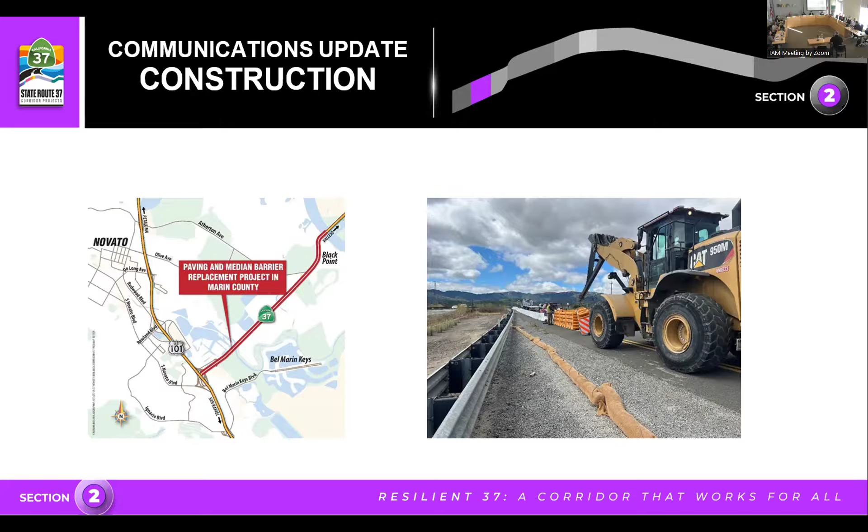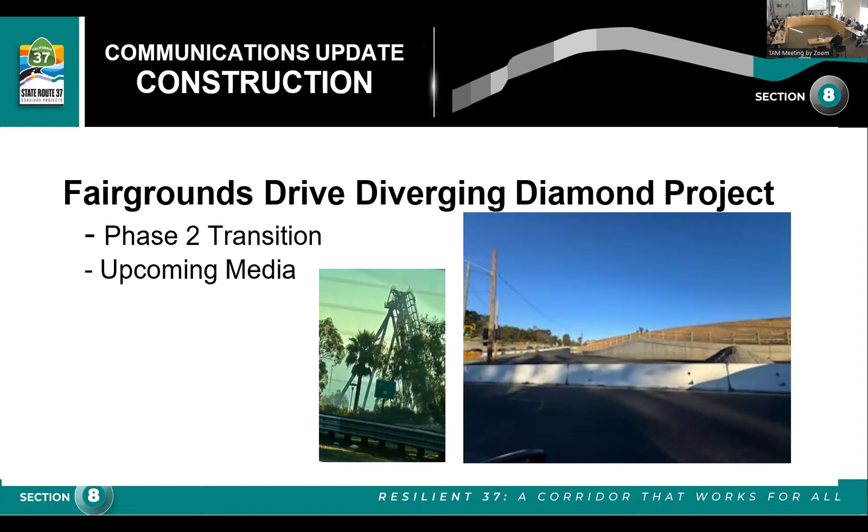So in March, you'll start to see some media work from my team prepping the public for this. We've got a fantastic animation that we've shown in previous policy committee meetings that we're going to be pushing out a little bit more through the media to get people ready for it. Those are our construction projects, and that project should be wrapping up in June. So moving on, because I know we want to keep it going.

The next slide should show flooding. So we did have flooding happen this January that basically closed the route westbound direction or eastbound direction for about 11 hours. And so this slide shows the two locations where it happened. The Marin area, we've seen; we don't see the Vallejo area happening as much.

And so the reason for it is kind of like a perfect storm. Whenever we see king tides happening at the same time we see an atmospheric river or heavy rainfall, then our maintenance teams, Caltrans maintenance teams, get ready to provide mitigation for flooding. In this case, I believe we had a supermoon, or like we had lions, tigers, and bears basically coming at us for this one. So we did see some flooding happening on the Vallejo side.

On the Marin side, because there are levees there, the maintenance team can do pumping and other things to clear the area. And on the Vallejo side, where this took place, there's nowhere to pump the water. So we basically had to wait for the waters to subside. So the next few slides that we'll just run through quickly will give you an idea of what the storm waters look like and how they were impassable.

These first ones are in Sonoma. So we can go through this one, Sonoma, the next one. That one gives you a little more idea of the debris that's left behind that we have to clean up before we can put the road back in service. Keep going, please. Okay, again, that's Sonoma. And then if we flip over to Vallejo, that's also Sonoma. You see a lot of debris on the Vallejo side, and we literally had to have maintenance out there kind of make a judgment call on when we could reopen the route. Next one.

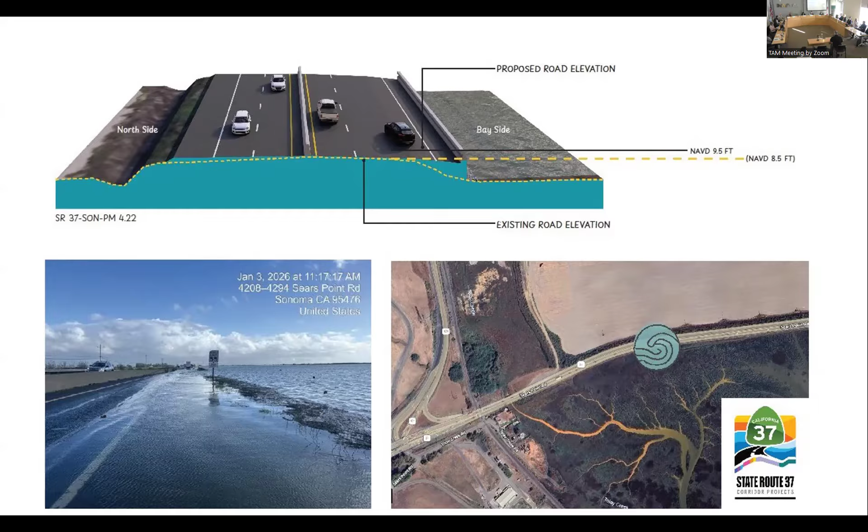If you want to go to the next slide. There you can see the debris and that type of stuff might have been held to a minimum. It would have probably reduced the amount of time that the route was closed. The route was closed for approximately 11 hours, but we can't say for sure that it would have completely mitigated this particular flood, but it definitely would have improved it. And Javier, as the project manager, anything you want to add to that? Sure, Bart, thank you.

Yeah, another improvement as part of this project is we're doing embankment improvements. So in some sections, we'll have an embankment confinement system at the edges, and in other sections, we'll have a pile-supported retaining wall. So that would itself act as a shield to protect the pavement section. So here, it's sort of exposed to damage on the pavement from the flooding. So that's another improvement that you would see as part of this project.

Okay. So wrapping up from a communication standpoint, on the construction projects, our primary public communication has been through traffic advisories and through social media. In Vallejo, where we've got the diverging diamond interchange, we've been working closely with the CVO to help the Crest community understand what the impacts potentially will be. Obviously, we've got big barriers that are in place there right now.

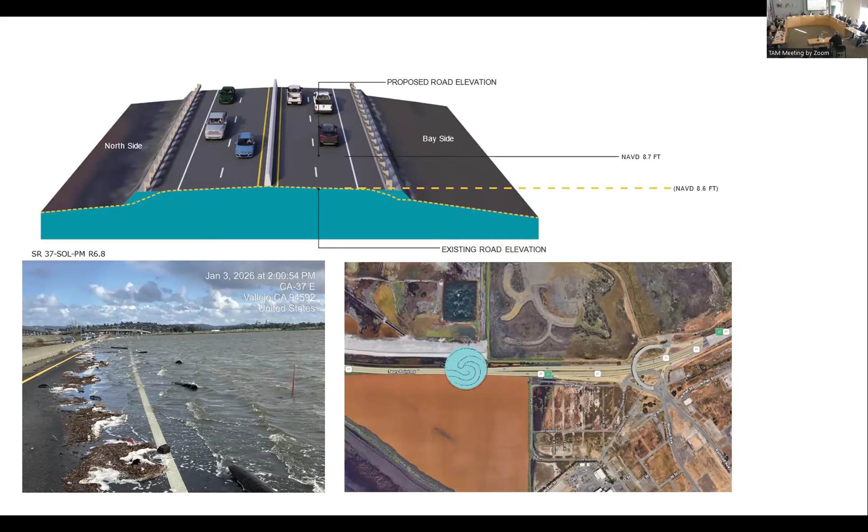So we felt like we would share that in the communications portion of our show because it's a natural question that comes up given the fact that we lost the route again this year. And with that, that's everything we have going on in communication. Thank you, Bart. Any questions?

Mayor Sorce. Well, thank you for the update. And we had talked a little bit last year about, especially in Vallejo and Solano County, the concerns over the tolling and kind of regrouping and doing some more outreach in the community, given that the polling that informed this project was done many years ago, and the residents did say they valued addressing the congestion. Although they didn't like the idea of a toll, the highest priority was to reduce the congestion, and we wanted to kind of loop back and make sure everybody was aware of kind of the reasoning behind this and the work that had been done.

And you know, given the flooding that just happened, I kind of wanted to elevate that again, because I think that put it in the forefront of everybody's minds. I certainly got some communications about it in Vallejo of like, my God, how quickly can we get this project going? We clearly need it. You know, the interim project, like, would we love a raised causeway? Great. Would we love to try to get funding to do it without having to toll us? Like, yes, but how quickly can we do this?

So I kind of wanted to raise that and see if other folks in other counties have gotten similar comments from residents of just this flooding kind of accentuated that we really don't have a choice but to do something as soon as possible. And I hope we can continue those plans to re-engage the community in Vallejo, because there very much still are concerns about the tolling and the equity of the tolling. And we need to have those conversations, but there's also a renewed urgency of like, we're dealing with flooding issues that aren't going anywhere, and we can't really wait much longer before we address this.

Morning, members of the Policy Committee. My name is Kevin Chen with the Metropolitan Transportation Commission. I'm joined by Javier Mandeville of Caltrans. We're here to provide you with an update on the near-term Sears Point to Mare Island Improvement Project. Next slide, please.

So today's focus is going to be on construction package 1. Now I just want to provide a little refresher on the construction packages as shown in this exhibit to the right. So for the purpose of project delivery and based on availability of funding, we are going to divvy up the project in 3 phases for delivery. The first one, as shown in red, originally would start from west of 121 to about a mile east of 121. And one of the major components of the first work package is to replace the Tolay Creek Bridge.

So that's package 1. Package 2 is to really build out the rest of the eastbound direction. That would include the Strip Marsh East that we just talked about, as well as initiate tolling on the corridor. Phase 3 is to finish out the project in the westbound direction, including initiating tolling in the westbound direction. So that's the overall construction phasing.

But today, again, the focus is on package 1. So today we'll talk a little bit more about the updated project cost, our funding status, schedule, and an update on the CMGC process. Next slide, please.

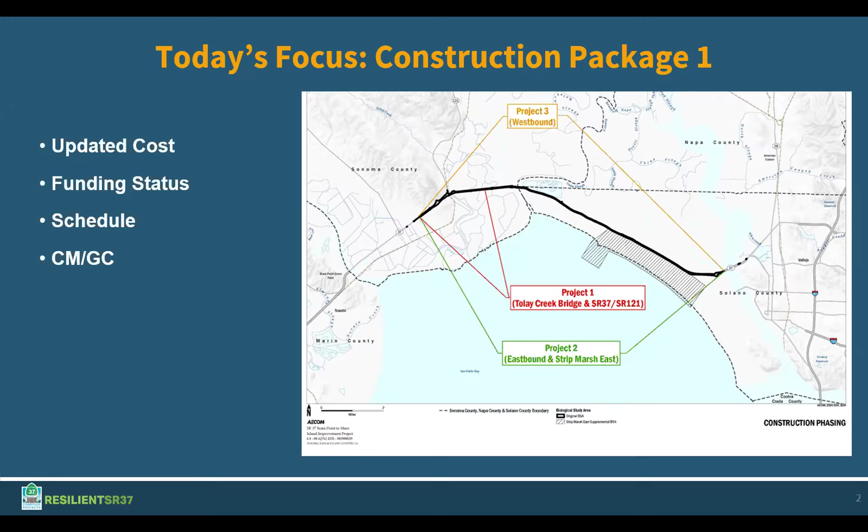So since we last met in November, one of the major updates that we need to provide you today is the construction cost estimate, which had increased very substantially since the last meeting. So we're looking at the previous estimate back in 2024, and we're looking at only construction capital costs. For package 1, it was in the order of $93 million. And in November, that estimate went up to $155 million for package 1. Again, just construction only. And the difference is more than $62 million.

So this created a huge challenge for us because this is significantly higher than the funding that we had previously secured as planned for package 1. Again, the numbers that we're showing on screen are for the original package 1 limit from west of 121 all the way to 1 mile past to the east side of 121. Next slide, please.

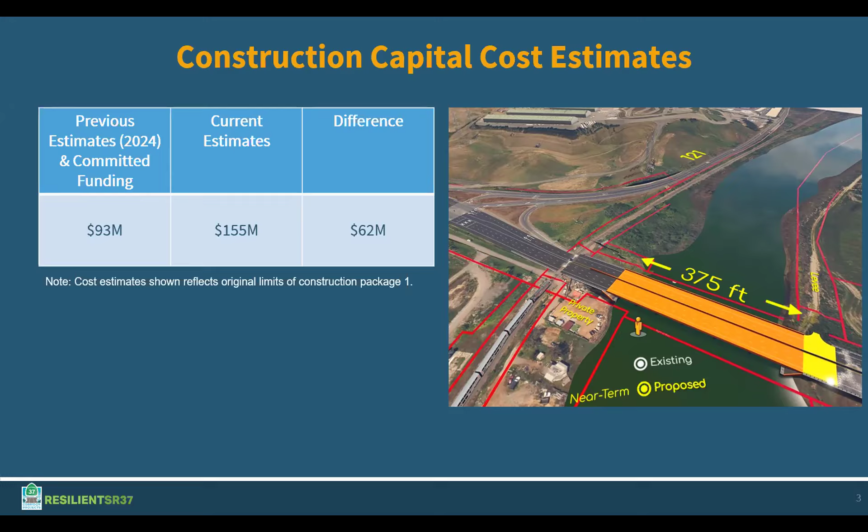So in terms of what's driving up the costs, one of the primary areas is really due to structural items. And that's really predicated on the subsurface conditions on this corridor, which really sits on a very thick layer of young bay muds. So through more detailed geotechnical studies throughout the design process, as well as more engineering calculations that were needed leading up to the 95% milestone that we talked about last time, it was really determined that the sheet pile walls that were previously proposed would not be sufficient and would result in excessive deflection on the roadway,

causing potential unsafe conditions. And because of that, we are moving to constructing retaining walls instead, along with the new bridge at Tolay Creek. And that's really necessary to provide a safe roadway for our travelers. So that's the bulk of it.

And in addition, the groundwater level is pretty high on this corridor, and the amount of dewatering effort that's needed for the construction is also going to be very substantial, higher than anticipated before. And in terms of the widening that's going to be needed as part of the project, it won't be conventional fill, but it will be engineered lightweight fill, which added to the cost increase. So all of that adds up to a lot of cost increase.

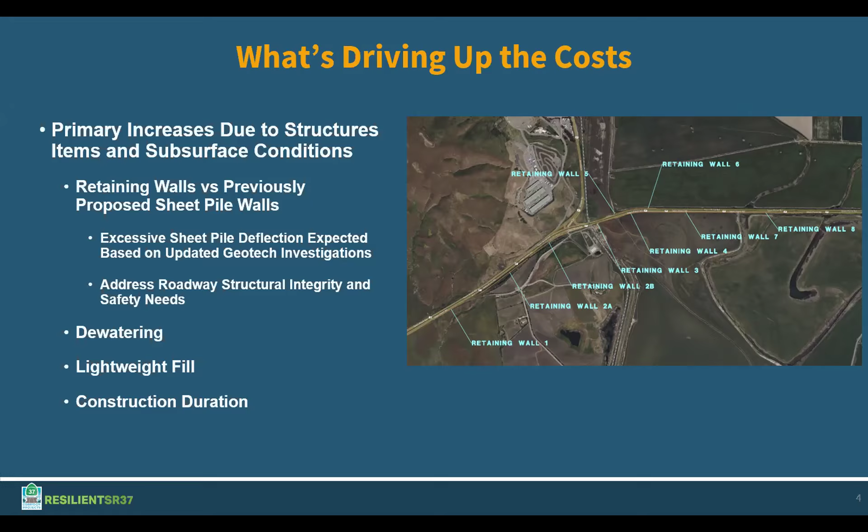It's not a surprise that as design progresses, and especially in recent years, construction costs have been going up, but this increase is substantial. Next slide, please. So since November, we've been working very closely with the team, with Caltrans, with all the partners, and really trying to come up with ideas on how we can proceed with package one. Because it is important in many ways that I'll explain later.

And we kind of have a two-pronged approach. One is, based on the funding that we have currently, what improvements can we defer to package two while still maintaining independent utility for this package one. For example, we can't build half a bridge. That's obvious. So we need to be able to construct something that means something.

And one major area that we've come to is we're going to defer most of the improvements west of 121. We know that that's definitely not ideal because that would mean that we're cutting out some of the benefits for folks traveling eastbound and going north on 121 because we won't be able to extend the left turn lane. So some of those benefits are not going to be realized until we deliver package two later.

But that would help us cut down the cost and still be able to maintain independent utility going east of 121 and deliver the new bridge. So that's one area. Then the second part of the two-pronged approach is, within the scope of work that we cannot defer, how can we reduce that cost?

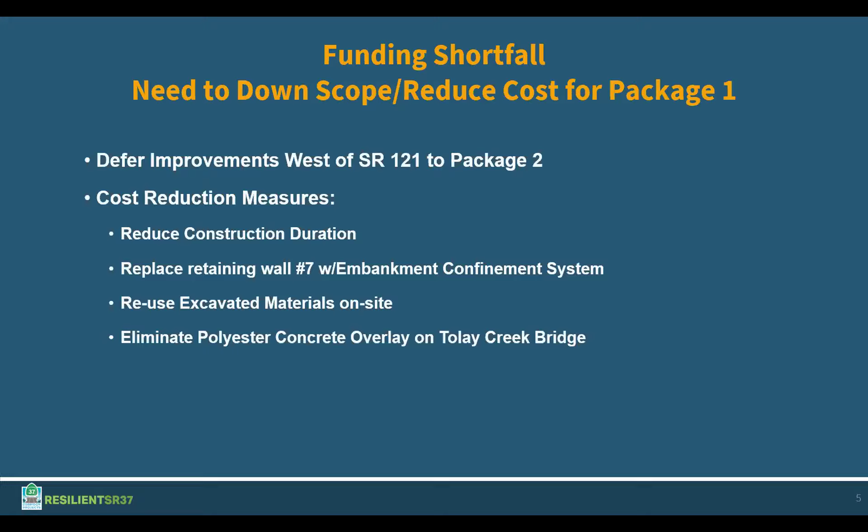So with this two-prong approach, in terms of deferring the scope of work as well as reducing the cost on some of the necessary scope components, our current revised total cost for construction is $190 million for this first work package. Now, this includes the capital construction cost as well as construction support cost, which is also very substantial. That kind of goes proportional with the capital cost. It also includes some of the right-of-way items like off-site stormwater treatment, incidental permitting mitigations, and public access improvements.

It also accounts for project risk as we get into construction because replacing a bridge is going to be complicated, and dealing with the retaining walls and the subsoil condition out there. So we do need to make sure that we have some contingency to account for unexpected conditions come the actual construction phase. So right now we are aiming for a total cost of $190 million to account for all those things.

Our committed funding is at $135 million, and these include $20 million of SHOPP funds that Caltrans had as part of the improvements to extend the eastbound lane. We have RM3, Regional Measure 3 funds. We have OBAG 3 funds. We also have $50 million from the CTC LPP grant that we worked very hard to secure, as well as $20 million from the PROTECT funds that was also competitive.

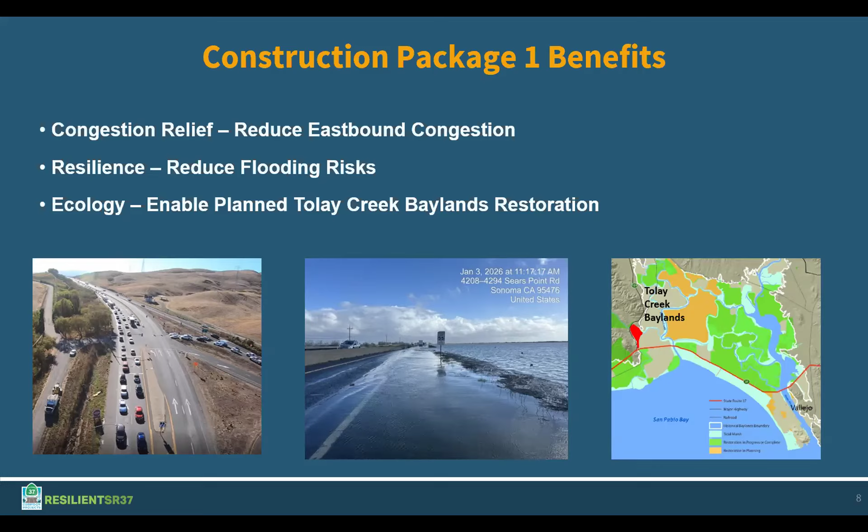So as I've mentioned to you all before, we procured a pre-construction service contract on this project, and we've selected Kiewit as the construction manager for that. They've been really instrumental in providing input, especially for constructability and means and methods, which has really aided our coordination with permitting agencies for identifying impacts as well. And overall, it's led us to coming up with a better designed product as well.

Unfortunately, we weren't able to agree on price for package one, so Tolay Creek Bridge replacement and the intersection improvements. So we're pivoting to design-bid-build, and we're going to advertise for low bid for that first construction package. For packages 2 and 3, we're still planning on working with Kiewit. We'll have more time to incorporate innovation.

Like Kevin highlighted in the previous part of the presentation, we're sort of at the 11th hour, so there's not a whole lot of time to make any changes, and we're sort of stuck with the cost estimates that we've developed. But as I said, we're looking forward to working closely with them on the subsequent packages 2 and 3. And hopefully we'll be able to agree on price and work with them on construction for those packages.

That concludes the presentation. We'll take questions. All right. Thank you, Kevin. Thank you, Javier. I'll look to my colleagues here. Start with you, Councilmember Eklund. Yeah, I was going to wait, but okay, go ahead. Thank you.

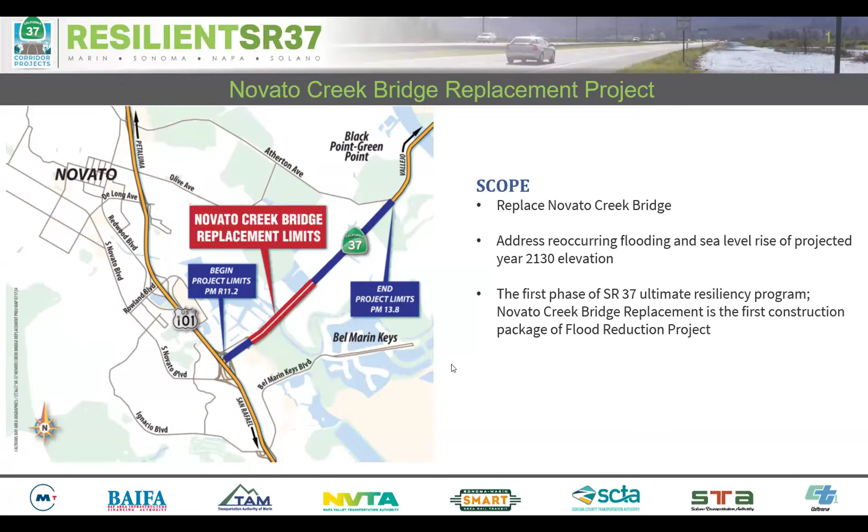So we have various funding sources, all from federal, state, local. I've covered them in detail in previous meetings, so I won't spend time, but we have a fully funded project. Next slide, please.

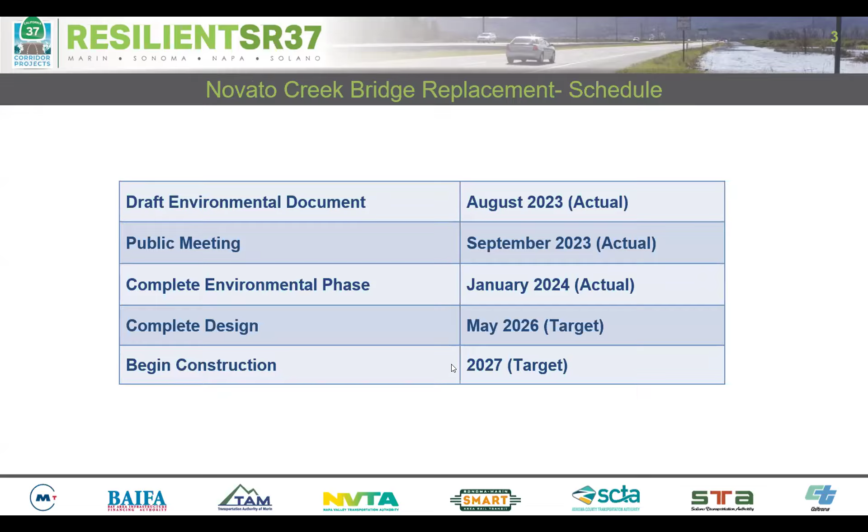Our schedule is largely driven by IIJA funding allocation requirements, which require us to complete the design by May of this year. We're on target for that. And then we'll be expected to start construction the following year in 2027. Next slide, please.

One of the challenges for this project is our accelerated permitting schedule. So we do have quite a few permits on this project. In particular, the 404 and the biological opinions are technically long lead permits from the feds. So we're working really closely with agency staff to make sure we give them everything they need to issue the permits. But yeah, just wanted to highlight that it is a compressed permitting timeline, and we do need to work together to make sure the project's successful.

Next slide, please. I think that's it, actually. Great. Any questions on this update? Councilmember Eklund. Could you elaborate a little bit more on the uncertainty of the permits for Section 404 in the biological opinion? Right. So the Section 404 application can't be deemed complete until we receive the biological opinions. So they're sort of tied together.

And I guess with possible federal government shutdowns, right? I think the last one that happened didn't impact these agencies, but it's always a risk. You never know. It did happen, I think, late last year, and it already impacted our schedule because they didn't work for a month or two. So yeah, I guess that's sort of what I meant.

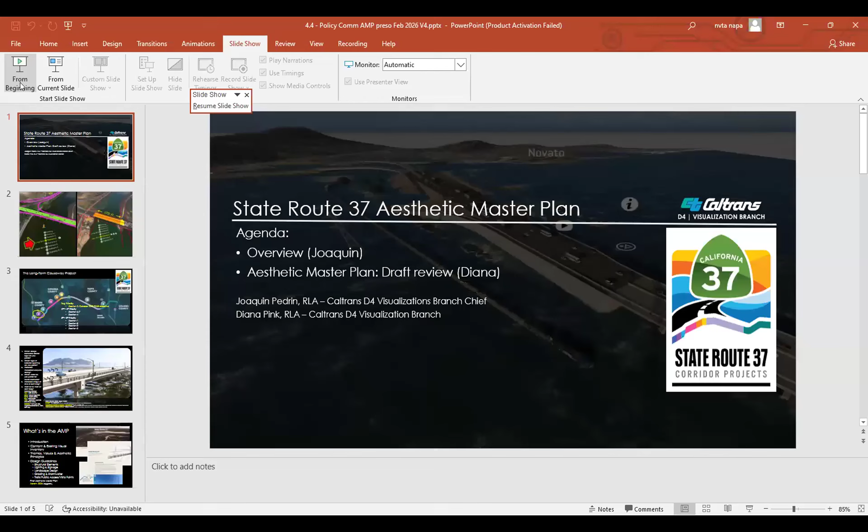And so, lighter fare for the next 10 minutes, guys. So we're going to be talking about the future aesthetics of State Route 37. So we'll get out of the pickle weeds right now and look at the long-term project. All right. So quickly, my name is Joaquin Pedrin. I'm a senior landscape architect at Caltrans. I'm joined by Diana Pink on my staff, who is also a landscape architect at Caltrans and the technical lead for all things State Route 37 involved with landscape architecture, responsible for those wonderful 3D sections that you saw in Bart Ney's presentation.

Okay, next slide, please. All right, so back in May, we started this effort, and it was based on the wise recommendation and prompting by Andy Vermeer, understanding that over the next 25 years, we're going to be establishing this 21-mile corridor. And let's have some consistency across that thing, because there are risks every time we do these little projects. As you see, the funding's challenging as every project comes up, we get through them. Is there consistency over this causeway? So it's not the Bay Bridge in one fell swoop, it's lots of little parts. So with that wonderful prompting and the fantastic support from Caltrans leadership, they funded an aesthetics master plan that we are pulling off. And so that was established with a working group.

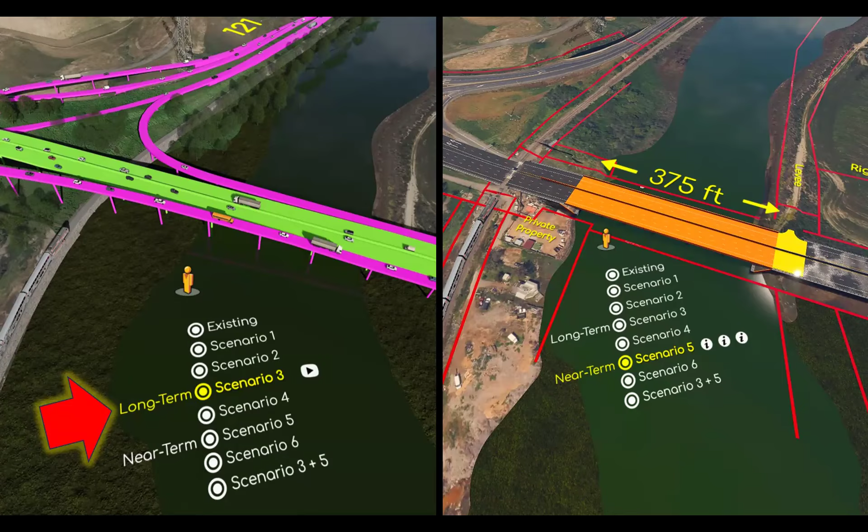And so if we go to the next slide. Oh, really quick, let's stay on this slide for a second. I do want to emphasize that this is specifically for the long-term solution. And you see the near term on the right side there. And so this doesn't necessarily apply to interim projects, but it's for the long-term causeway when we have this structure elevated up approximately 30 feet in the air. Okay, next slide, please.

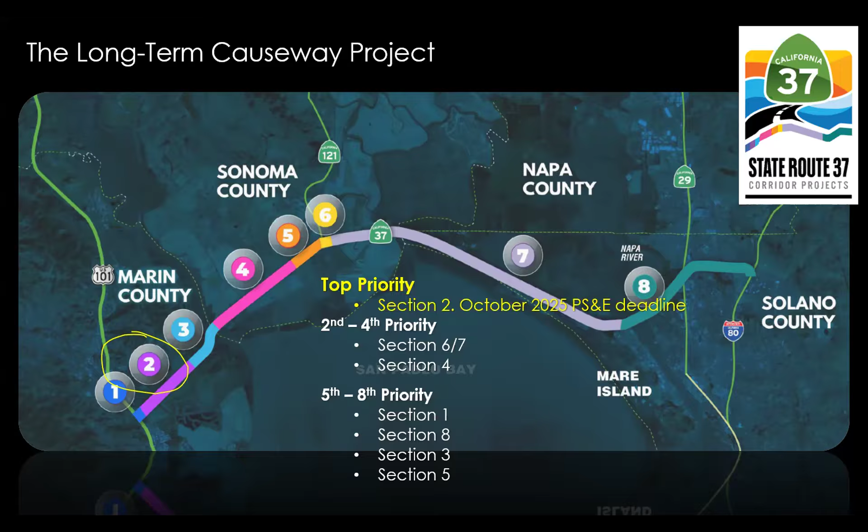There were some time constraints. So we started in May. We had to meet an October deadline that Javier was talking about with the first long-term project. We have a 1,000-foot section of the causeway that's being established right now. So we needed to come to a consensus with our working group on what those aesthetics were going to be, because this was going to set the precedent for the rest of the 21 miles of this corridor. So next slide.

Here you see the outcome. So this is the final causeway design for that 1,000-foot section. That is the precedent-setting portion for the rest of the 21-mile corridor. So we established this with our working group, and you can see the working group on the bottom left there. And we consulted with them, and we went through different context review of the area, which Diana will walk us through quickly. And we also reviewed and got some input from SMART. So Bill Gamlen, he was fantastic and had some good comments.

And then with the tribes. And so Graton Rancheria, Buffy McQuillen, and from Yocha Dehe, Gayle had some fantastic input for us to include in the aesthetics master plan, which will be forthcoming. The final edition of this thing is going to happen in the next couple of months, and it is all a digital deliverable, so a living document that we can modify as we move forward. And so you'll see the 6 different items up there, and these are things that the working group could make decisions on. And so this met the timeline for delivering on the long-term project at Novato Creek Bridge.

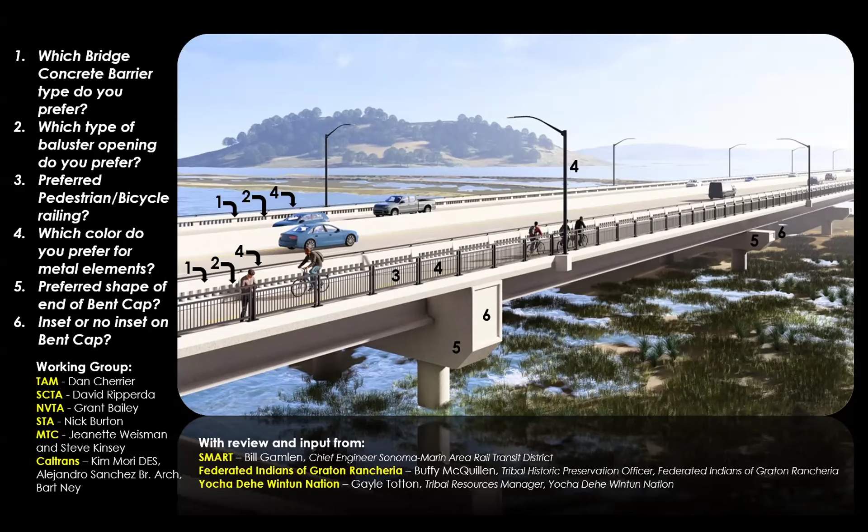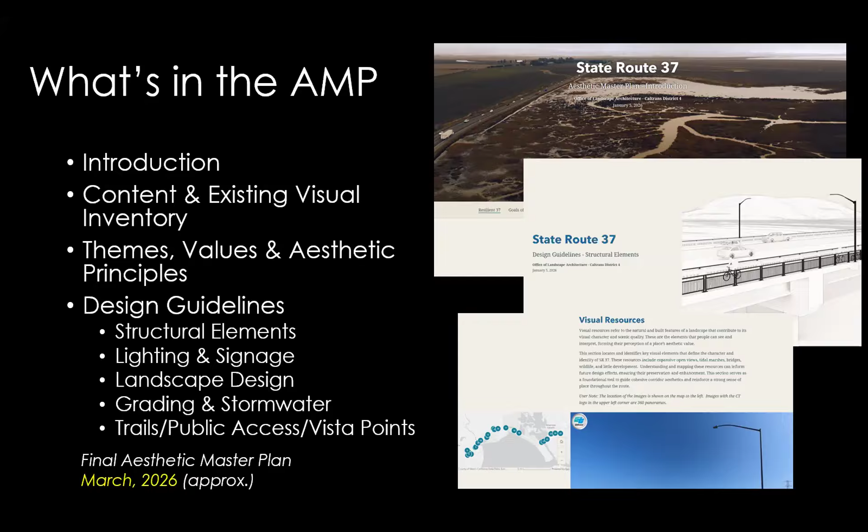So you guys can look through that, but not to take up too much of Diana's time, we'll hand it over to you. And so what Diana will be showing is the story maps of the aesthetic master plan. Thank you, Joaquin, and good morning, everyone. I will try to walk. Dramatic pause, there we go.

So as Joaquin mentioned, we've created this aesthetic master plan as sort of a digital delivery, with our intention that this is kind of a living, breathing document, understanding that the ultimate project has got a long time span. Certainly, we've just heard a lot about funding challenges. So knowing that that's going to happen and leaving a little bit of flexibility as all these projects start to move forward. I think we're fingers crossed hoping for 2050 for the final ultimate project to be completed. So we're talking a 25-year span here. So we thought this was probably the best way to share this document with everyone.

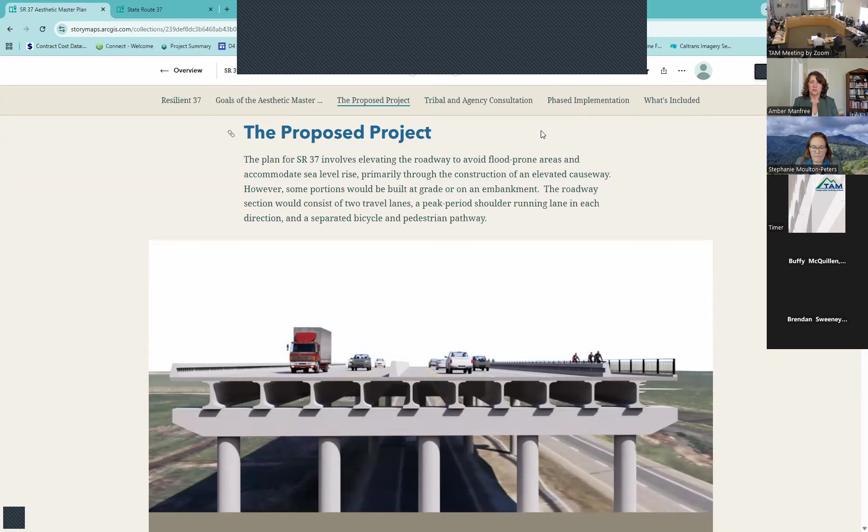So starting off, there's our introduction story map. Basically, I like to think of this as sort of our table of contents. So introducing the goals for this aesthetic master plan, what the proposed project is, touching on our stakeholder coordination and collaborations. Again, touching on this long timeline, the different phases of the projects, and then really the meat of what this document is. So all these different story maps. So we'll be going through what's included here.

So our first major task was doing a context and existing visual inventory. So we went out there and documented and collected any visual elements that had influence and impact on the visual environment. So we started big picture. We were looking at what's the regional context that 37 sits in, and then started to zoom in more and more.

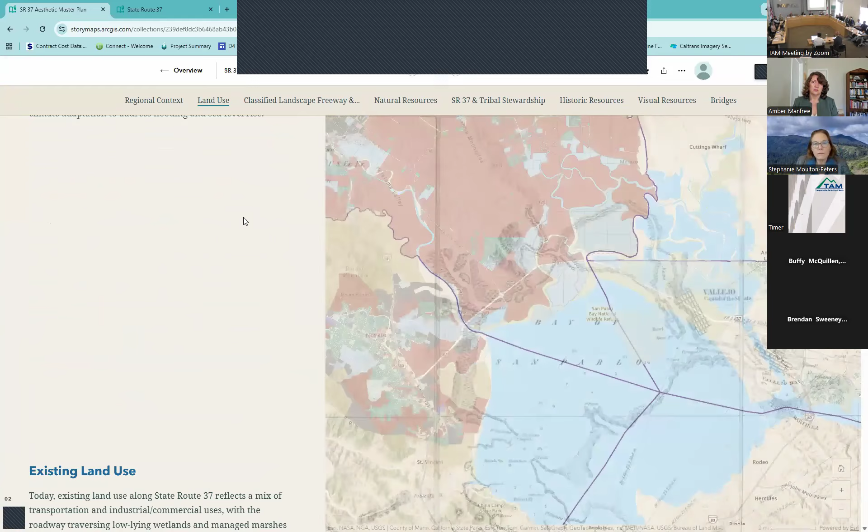So what are the existing adjacent land uses to the project? Is any of the corridor a state scenic or county scenic highway or corridor? Is any of it classified landscape freeway that can have impact on visuals? And then we took a look at the natural, cultural, and historic surroundings and settings. So I can just burn through these quickly.

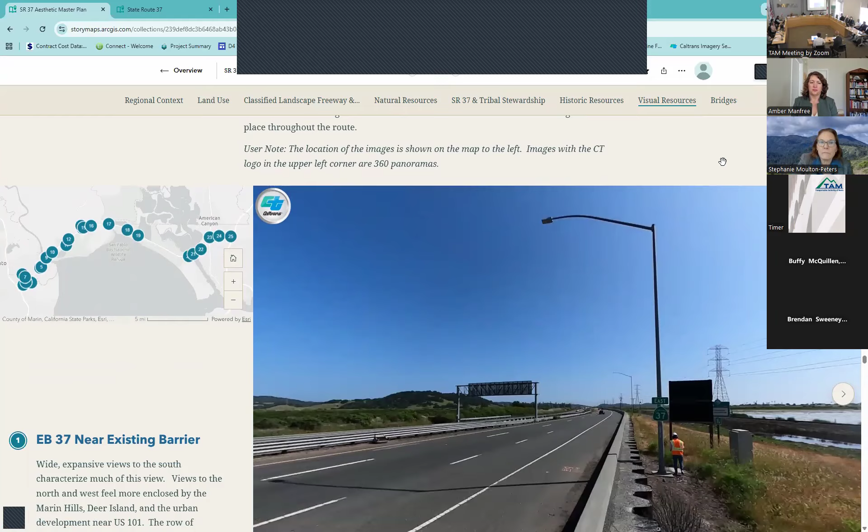And then we went through and did a lot of ground truthing. So we went out there from the west end to the east end, stopping, taking pictures, and I won't spend the time to go through all of this, trying to capture what is the environment? What do you see out there? What is the feeling that you have out there?

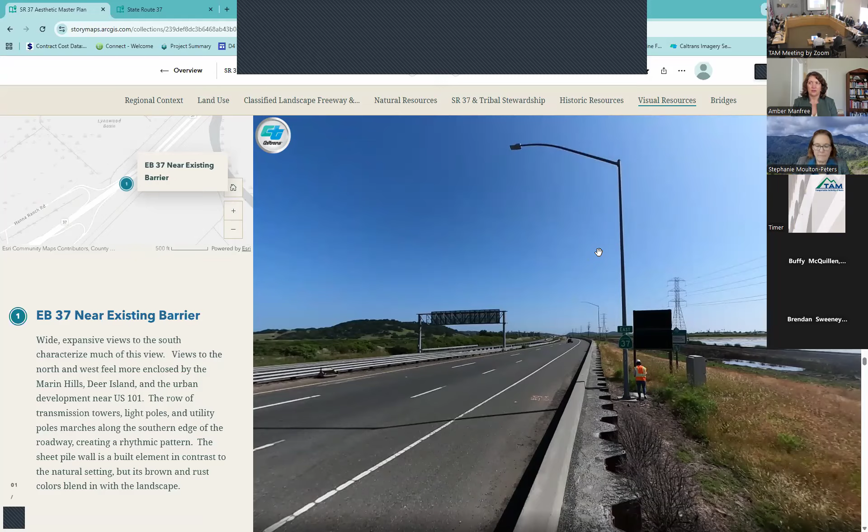And so after gathering all this information, we shared this and put together a list of questions for our working group, a lot of who are actually sitting here behind me. We got some great feedback and input. We met all together. And through that process, we developed these themes and values and aesthetic principles. So these are those big picture, 80,000 foot ideas. They're the foundations, sort of our touchstone to go back to, what's really important. What do we think are the most critical items out there in a visual context?

So integration with the natural environment, looking at that user-centered experience, cohesive, having the corridor be one idea, but allowing for subtle shifts in different places. To me, the corridor has an overall character, but there are those differences. And so being able to celebrate those as we move through the various counties and the different ecotypes. So we did the values and then the aesthetic principles, building off of those themes.

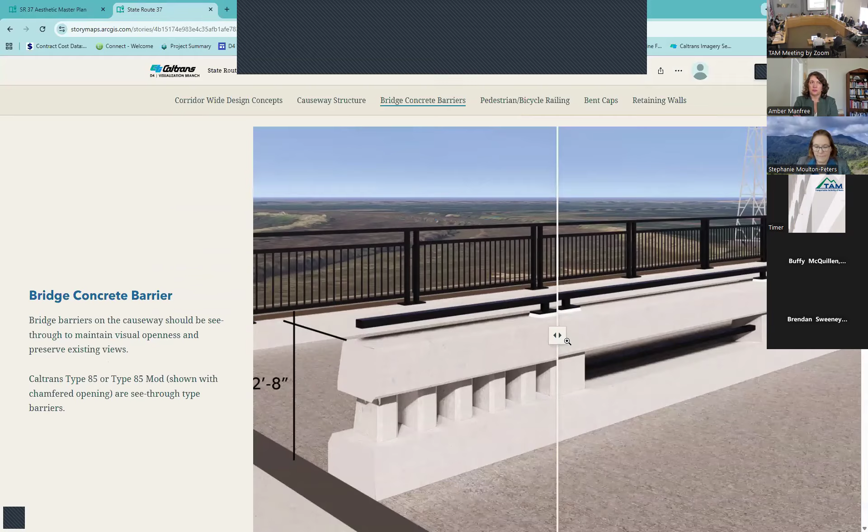And then as part of that themes and values, we also shared a bunch of different alternatives for the causeway structure. I can share that quickly. So we went through and said, hey, which of these do you like? How do you like the pickets on the pedestrian rail? So we also sent that out to the working group, did another survey list of questions, again, got great feedback. And so we've been building off of that into our design guidelines.

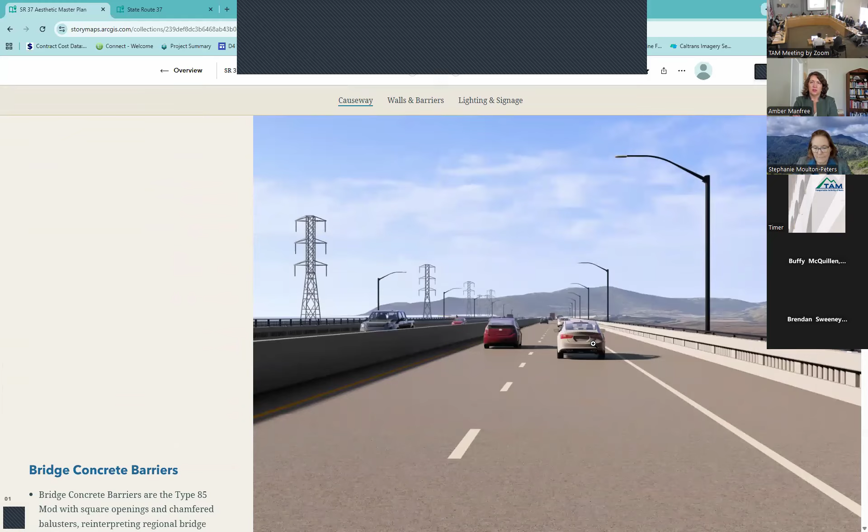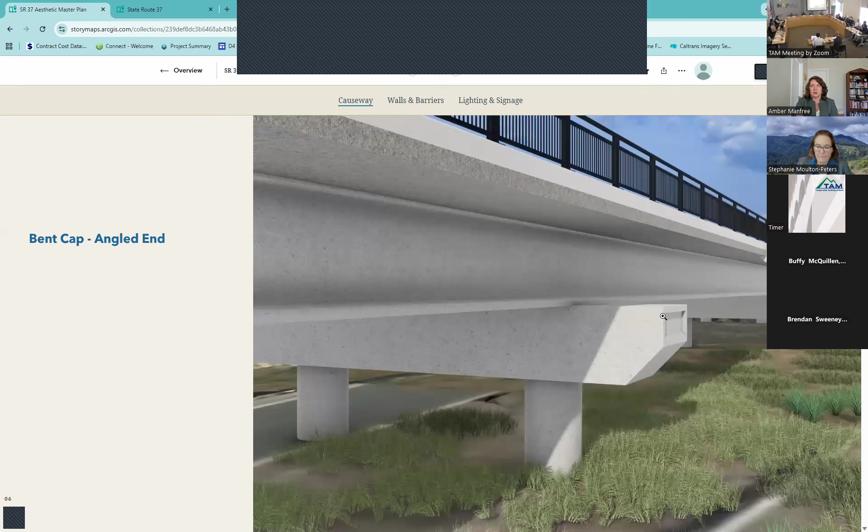And so this particular story map is touching on those structural elements, so what's included in the causeway. So what does the concrete bridge barrier look like? What does this pedestrian railing look like out here adjacent to the bike and pedestrian path? I'll scroll through this quickly. What does the end of the bent caps on the bridge look like? So all those small details on the structure.

And then I'll jump back to this one. So we'll continue to develop these design guidelines. The other sections will include stormwater, trails, public access, any vista points out there. And as Joaquin mentioned, we're hoping to have our final master plan in the next few months. So unless you have anything else to add, I think we're open for any questions.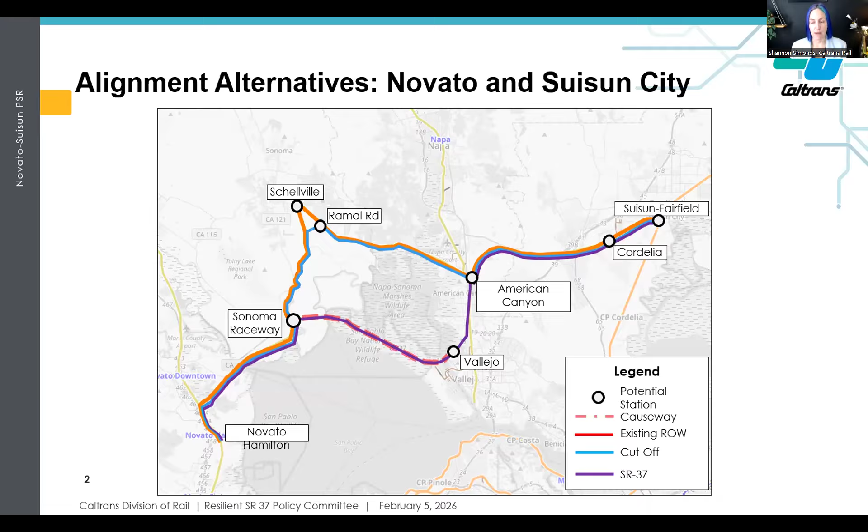And then we also wanted to take this opportunity to look at an alignment more closely aligned with State Route 37 and State Route 37 future improvements, in part for many of the reasons that everyone has already mentioned, that it might open up different opportunities for funding sources and project delivery streamlining, but also to be able to serve different markets, namely Vallejo. Next slide, please. So once we looked at the 3 physical alternatives, then we looked at 11 different service alternatives within the 3 physical alignment alternatives.

So there's 2 main service types that we looked at. One we call through running. So this is really looking at, could we run an existing locomotive hauled train off of the main lines coming from Sacramento onto the existing rail right-of-way or whatever future right-of-way is in this corridor over to Novato, and then making those timed cross-platform transfers with SMART.

The second option is what we're calling the shuttle service. Shuttle service would look at really just ping-ponging service back and forth between Novato and the Suisun Fairfield station. This would allow us more flexibility in the type of operator and equipment that we potentially use, because it wouldn't be coming on to the Union Pacific main line at Suisun Fairfield. But you would then have to time cross-platform transfers at both Novato and at the existing Suisun Fairfield station. So we looked at basically each of the alignments for shuttle and through running.

And then when we got down to the State Route 37 alignment, we wanted to also look at double and single tracking within all of those options. Because when we first started looking at our service options, we noticed that there was an opportunity to have trains meet on a causeway, but that obviously adds some complexity and additional infrastructure, having to double track the entire causeway. So we played around with the different service alternatives and how we could potentially single or double track the causeway portion to still deliver the travel time and the operational needs that we have here.

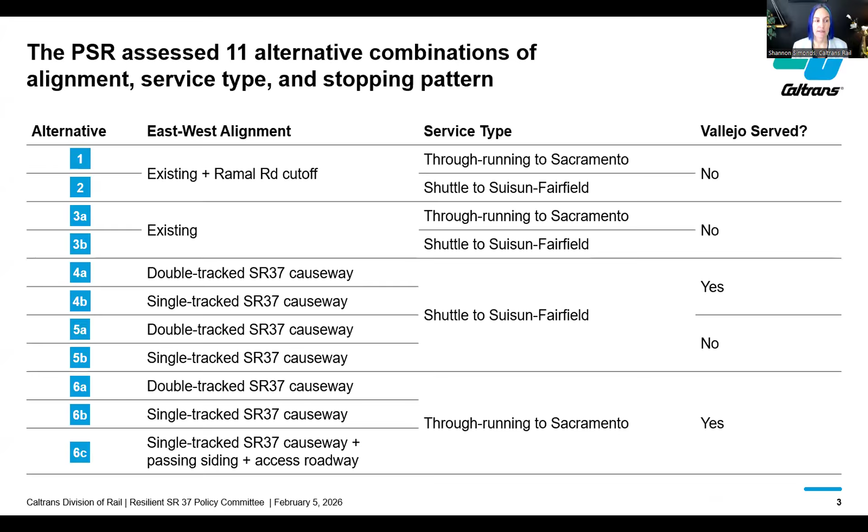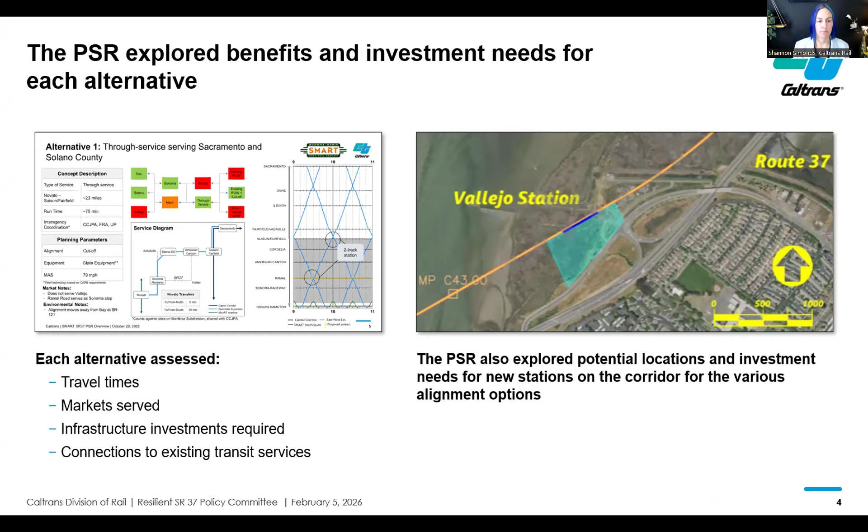And then on the right, we also explored potential locations and investment needs for new stations on the corridor for a couple of the different alignment alternatives. And so you can see one of the potential options for Vallejo kind of at the edge of the city there. Next slide, please.

All of this is going to continue to be analyzed as part of our corridor identification and development program that Bryce will talk about in a second, but continuing on that path of project development, the preliminary schedule for this is to expect to begin preliminary engineering for an identified alternative in 2031, with a goal, though aggressive goal, of 2037 construction package complete and the start of passenger rail service in the corridor between Novato and Suisun-Fairfield.

And so all of this work was done before we knew about Corridor ID, but it's been a really great opportunity to use all of this as an input to this new federal planning and project development program that we're going to be teed up to work on to really advance and refine the alternatives and make decisions in this corridor. And so with that, I am going to say next slide and hand it over to Bryce.

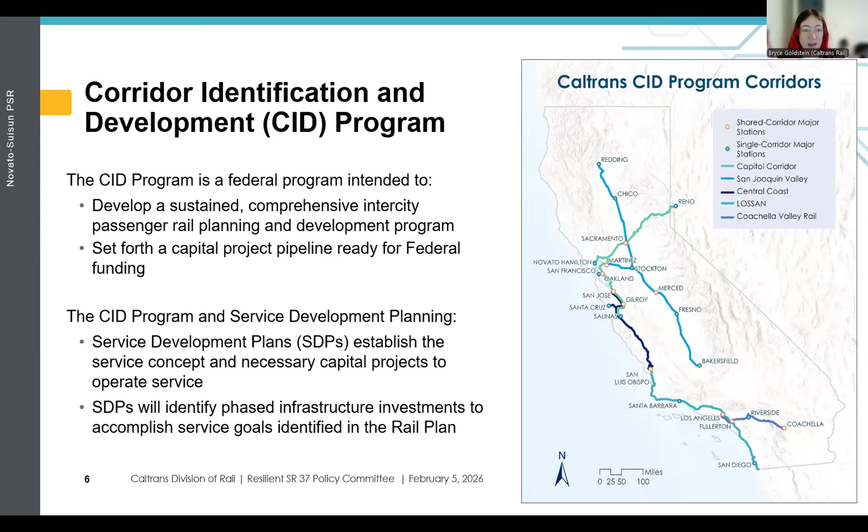Caltrans is the sponsor of 5 different corridors that are in Corridor ID. So we have the Capitol Corridor, which you'll find the Novato to Suisun corridor under, as seen at right. This corridor contains both the existing Capitol Corridor service area as we know it, as well as proposed extensions to Novato, as well as Reno, San Francisco, and Salinas. And there's overlap with other corridors such as the Central Coast Corridor.

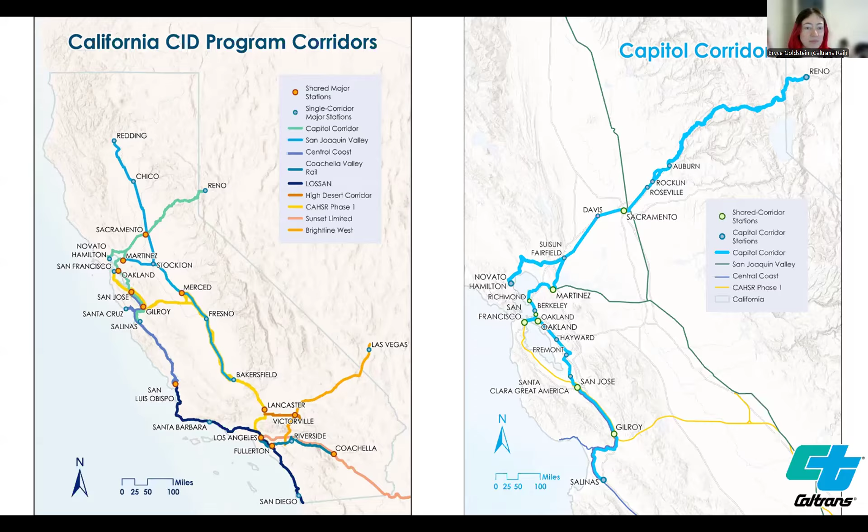We also, under this program, are the sponsor of 4 other corridors, which is the San Joaquin Valley, Central Coast, Coachella Valley, and LOSSAN. Next slide, please. There are 3 main steps of Corridor ID.

We are currently at the end of step 1, where we scoped for our service development plan in step 2. Under step 1, we developed our scope, schedule, and budget for that work, where in step 2, it'll be a rigorous project planning and development project where we develop our service development plan, which determines which projects move on into preliminary engineering and environmental review in step 3.

Projects that move on into step 3, if they complete step 3, will move on into a project pipeline and may be prioritized for funding under the Federal-State Partnership program. So step 3 will move into NEPA and preliminary engineering, and this gives us a great opportunity to prioritize our projects and hopefully have a better shot at getting federal funds. Next slide, please.

We're very excited about this opportunity to partner with the federal government to develop our corridor and identify projects towards implementing rail service. Corridor ID will provide us with a structured, documented framework to validate projects with standard methodologies across each corridor and statewide. The standardized methodologies throughout the state will help improve efficiency and help us prioritize our projects.